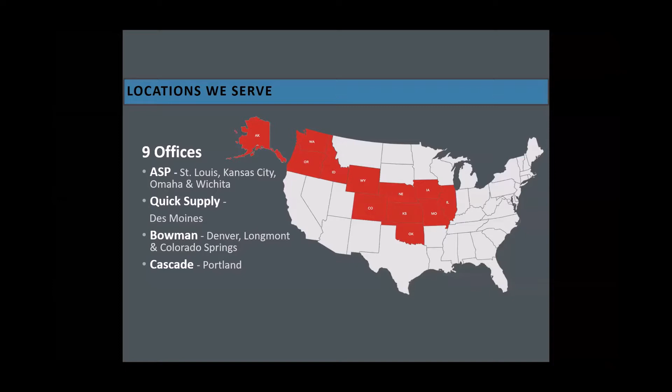ASP, Quick Supply, Bowman Construction Supply, and Cascade Geosynthetics are all one company. I'm the one civil engineer you see on the screen there. Our companies have been around for more than 40 years, providing not only construction site solutions, but also advice. And that's how we became the trusted site solution specialists across a large part of the United States. We do have site solutions that include erosion control, sediment control, geosynthetics, geotextiles, in addition to stormwater management, which is my specialty. And many of our branches have hardscapes and some really awesome outdoor living solutions.

We've also grown into some other paving solutions and other things that you might not think fit with the rest of our offerings. When in doubt, ask us. If you go to a conference, or you're looking online, or you're looking through a magazine and you see a solution you're not familiar with, reach out to your local rep from our companies or contact me directly, and we might actually know something about it or something like it.

And we are blessed with not only a lot of warehouse space, but a lot of yard space and a lot of trucks and a lot of drivers. One of the things we specialize in is putting together a specific order to bring to your site at a time that works for you. And we're very good at satisfying those needs.

Even during this pandemic, we have broken records in many of our branches throughout our companies with our sales numbers, because being in an essential industry, one thing that didn't slow down, fortunately, this year was construction. And the weather's cooperated to the tune of having, even in our northern states, Iowa, Nebraska, and even up in the Pacific Northwest, we are just still trucking right along. Normally the upper Midwest right now would be getting close to frozen and starting to shut down some projects, but we're still going strong.

So much so that some of our contractor customer friends are getting a little worn out. Some of those folks like to be laid off in the winter to do some hunting and to rest and recover, but they're still going strong, fortunately. So towards the end of this, I'll share our contact information again. Please reach out to me or any of us through any way you like to, whether it be social media or through our website or just the old-fashioned phone call. We'd love to get together with you.

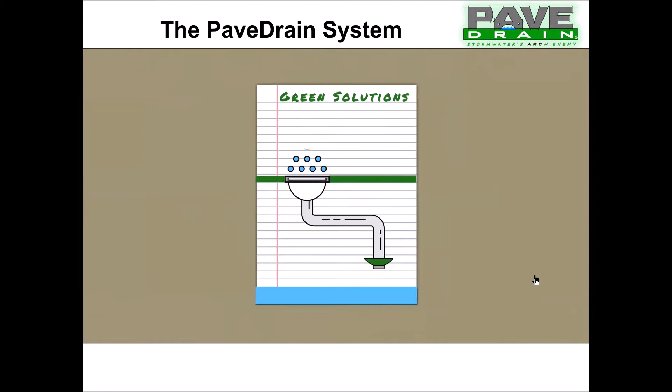Let's back up a couple of slides here. So there's where our office is located, and then the first thing we're going to show you is our cities are covered with impermeable surfaces. When it rains, rainwater has nowhere to go, except to sewer systems that struggle to handle the unprecedented strain. That's why we asked, what does your pavement do for you? Green technology has mostly failed to mitigate urban flooding and recharge aquifers. Green solutions look great on paper and may perform well at the start, but they disappoint quickly due to maintenance headaches, weak design, and their inability to handle intense rain events.

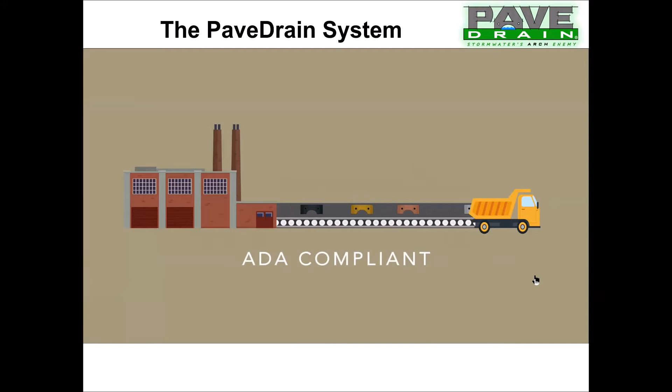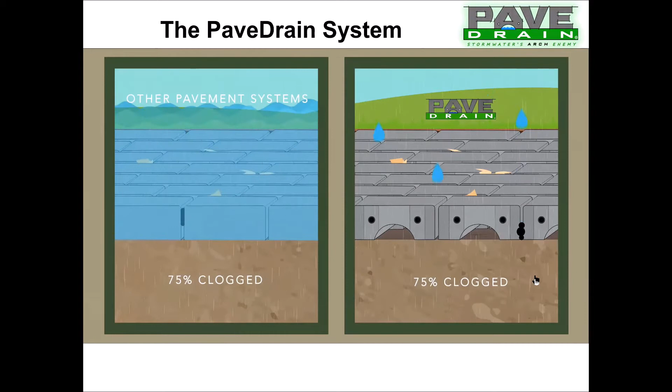The PaveDrain system solves these problems. For over 10 years, the PaveDrain system has proven effective for property owners looking to fix their drainage and paving challenges. The PaveDrain system is a simple yet unique solution that incorporates a patented arch design into large interlocking concrete blocks. The blocks are manufactured locally, available in several different colors, and are ADA compliant. When installed, gaps are left between the blocks for an unprecedented infiltration rate. Over time, debris will fill the joints, but maintenance is accomplished with vacuum trucks that remove the accumulated debris. Unlike other pavement systems, even when 75% clogged, the PaveDrain system still allows massive amounts of stormwater to infiltrate into the ground. With a properly designed and compacted open aggregate base, the PaveDrain system doesn't experience freeze or thaw heaving and can maintain its structure under extreme pressure.

We also offer heated PaveDrain, which eliminates the need for salt. The heated system infiltrates melted snow back into the ground, preventing runoff, which won't become an ice liability for you or your neighbor. So think about it: what does your pavement do for you? Contact us today to see how we can help with your new or existing infrastructure challenges. Visit our website at www.pavedrain.com to see recent success stories. PaveDrain, the world-leading permeable paving system.

There you have it. That video really does quite the job of selling it and telling everybody what it does. But I'm obligated to go through the whole thing because Bill promised to buy me lunch. Well played.

This is what the PaveDrain system is. We started in 2008, and those of you around in 2008 remember what happened quickly at the end of that year. The economy imploded, yet somehow we were able to keep going. Our first large-scale project was with this little company called Ford Motor Company in Louisville, Kentucky. About 90,000 square feet, still in use today. In 2018, 15,000 square feet of it was picked up, removed, and then reinstalled in another area due to plant expansion. So when we talk about the PaveDrain system being a sustainable stormwater solution, it is truly sustainable. They literally picked it up, moved it, and it's doing the same job it did 15 years ago, just in a different spot.

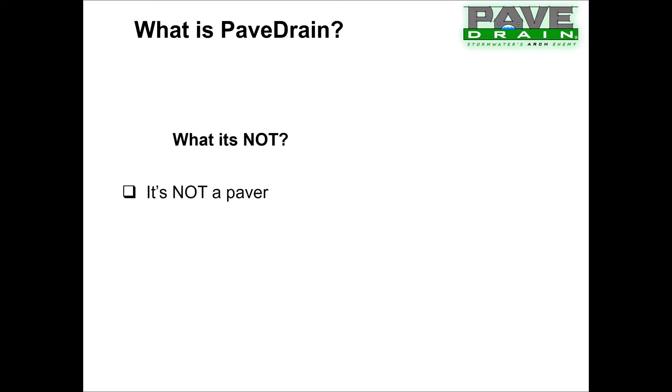So what is PaveDrain? The first thing we really try to differentiate ourselves from is this: it is not a paver. The only real characteristic it shares with a paver is that it's made out of concrete. That is it. We do everything we can to differentiate ourselves from permeable interlocking concrete pavers.

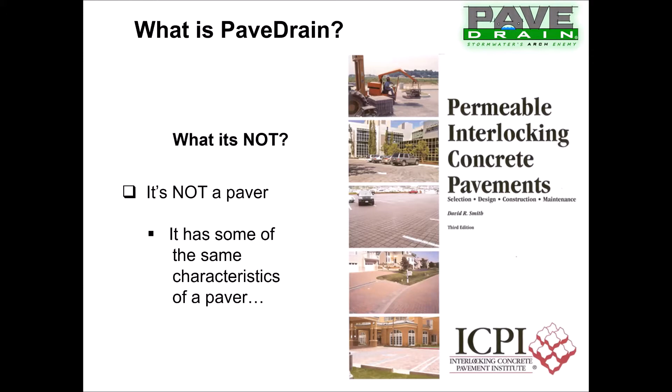We really like to look at ourselves, or think of ourselves, as a second generation. We took a lot of the positives of that, and what we really believe we did is improve on it. So what is PaveDrain?

It's a permeable articulating concrete block, or PACBM. It follows an existing ACB, articulating concrete block, ASTM. This has been around since the 1970s. Each individual block is 12 inches by 12 inches, 5.65 inches tall, and weighs in at a robust 48-ish pounds.

They're able to be picked up and installed by one person. There's a little known OSHA rule out there that says anything that weighs over 50 pounds requires 2 people to install it. Well, we know that gets broken quite a bit.

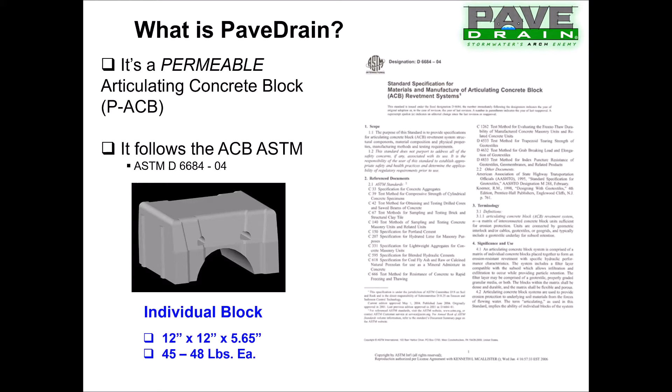So what we are able to do with all of our different block manufacturers around the United States is take this existing ASTM to them and say, make it to these specifications that have been around for many years. What it does is a bunch of things at once. It paves, it drains, and it can also store stormwater above your open aggregate base.

It is a system. We have multiple US and international patents. And what it really is, is a proven paving system. You'll hear us say the word system all the time because we need the proper geotextiles, proper compaction, proper geogrids, and everything else for it to work the way it's designed to work.

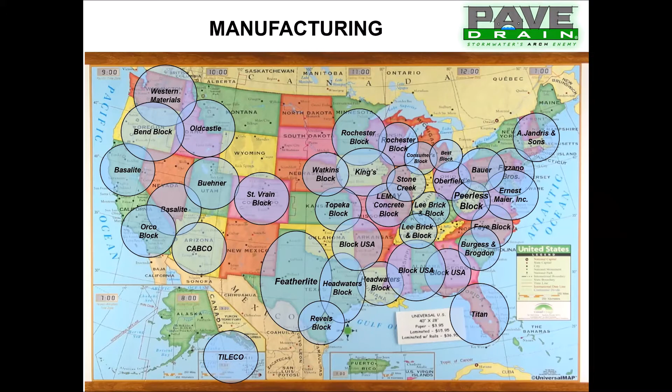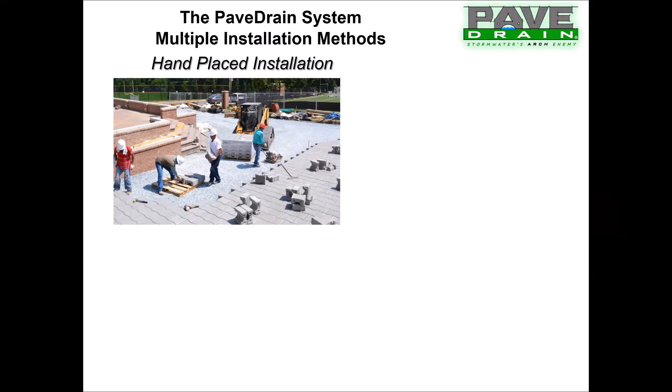We have multiple ways of installing it. Hand place installation - almost every project has some form of hand placement on it. A lot of you may be familiar with what we did early on in 2008, 9, 10, 11, 12, and into 2013, which was mattress installations, and most of that stemmed from the market.

There just wasn't enough work to go around, so the big general contractors all wanted to install mats across the parking lots, where they hooked up these 8x18 mats to a spreader bar supplied by us to a decent sized excavator, and they picked and swung large mattresses into place. We have not done a mattress job in over, I believe it's 5 or 6 years now.

What everything has gone to is what is called machine lay. And this has been a great way of going about it.

Many different types of contractors all across the country do that type of install. Between Bowman and ASP Quick, we can all figure out where that needs to go.

Now, one of the biggest differences between PaveDrain and the permeable paver world is they require rocks between the joints, meaning a permeable paver requires rocks to interfill it. Why? They don't really interlock, even in a herringbone type fashion, and they also need that rock between the joints - it's called aggregate interlock - in order to stay together, stay integral.

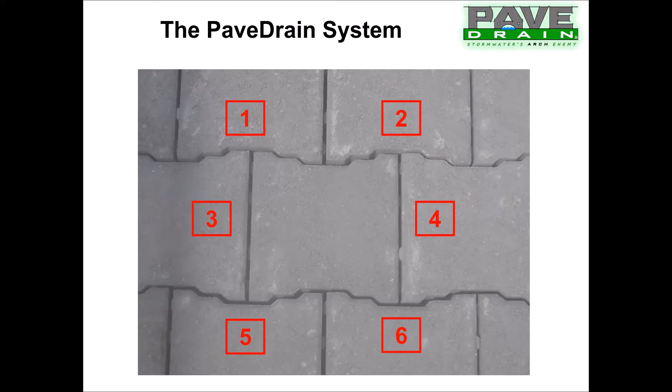PaveDrain, because of the way it was designed, each individual block is surrounded by 6 blocks - 2 above, 2 below, and 1 on each side. It is designed so that the joints between the PaveDrain blocks are meant to be left open. We do not want to sweep or fill these joints with rock.

We want that water to get in the ground, get back into where it belongs. We do not want it running off. We want it back into the ground. The other thing this does - eventually it'll fill up with debris. We understand that, and this will help tell you when it needs to be maintained. We'll get into that in our maintenance section a little later on.

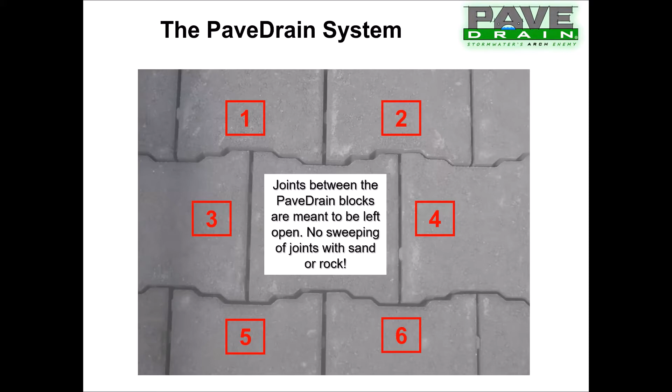All the corners are rounded so that no edge is created to catch on a snowplow. Will a steel snowplow blade do damage to a PaveDrain block? Absolutely. Will it chip it? Will it scrape it? Absolutely. Will it flip it out? Pretty much impossible. But it will do damage to it.

After we get done in our northern climates, after the contractor gets done installing it, one of the things we recommend and really require in our northern environments is to seal it. We can all help you determine what is the proper sealant to be done. Unlike other permeable systems, once installed, if they were sealed, they would no longer work. The PaveDrain system, once installed, you can go back in with a boom sprayer, a walk behind sprayer, whatever, and you can spray these into these systems and help seal them against the ravages of salt.

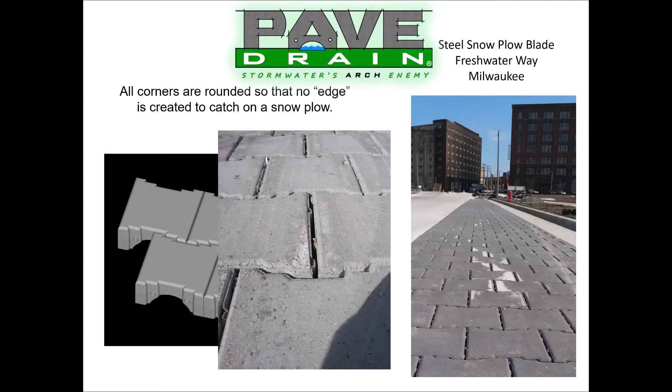Salt's very hard on anything with concrete. The PaveDrain system is no different. When we talk about PaveDrain, we talk about the system. Reasons we're with companies like ASP Quick, Bowman is because of their knowledge in the geotextile world. We need that system. We need it built correctly from the ground up.

The bottom layer of geotextile or geogrid, depending on your project, is typically woven monofilaments or multifilaments. We do not, repeat, do not want the slit tapes. Those filaments are flat. They have a tremendous amount of tensile strength to them, but they do not allow water to pass through. The monofilaments or multifilaments allow a tremendous amount of water to pass through. You hold it under a sink and all that water would go right through it, but they also have a tremendous amount of grab tensile strength to them so they can support the vehicular loading.

One thing we don't want is the non-wovens or the felt-like geotextiles. Most of the times they just do not have enough tensile strength, and they also can clog.

The rock layers, we need it compacted. We need it compacted in lifts. The bottom layer of rock on the bottom side is typically an ASTM number 2 or 3 size stone, basically the size of your fist. The top layer of rock, or our bedding layer, is an ASTM number 57 stone, 3/4 inch clean, angular. We want that rock all compacted in lifts and worked, especially that top layer of 57 stone, worked into that layer of number 2 or 3 stone. All of this is covered in our specification.

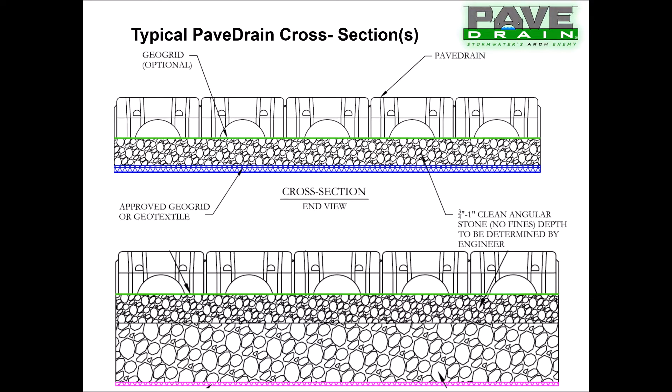One of our first projects we got involved with was a project in Bladensburg, Maryland, right outside the nation's capital. They were tired of their asphalt parking lot and all of the maintenance headaches that went with it, including patching it, sealing it, resealing it, patching it some more, and then again, after you seal it, you have to go back in and restripe it.

What they did is they went in and installed PaveDrain. And unique to this project, it never did anything but rain, sleet, and snow while they were putting this project in. Kind of unique to PaveDrain is the ability to work in inclement weather.

We've had several projects over the years that have allowed projects to get back on track or stay on track due to the fact that this is a precast system and it can be installed in rainy weather. Now, torrential downpour, nobody wants to really work in that, but it can be installed when it's raining, sprinkling a little bit, and we can still keep things on track. This particular project was under that, and they kept going and were allowed to put it in.

After that project was installed, the fire truck...

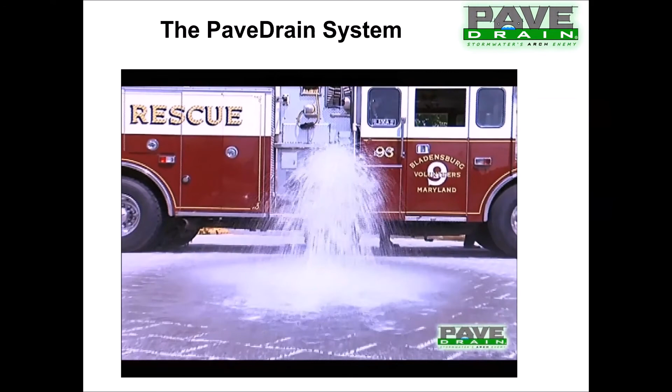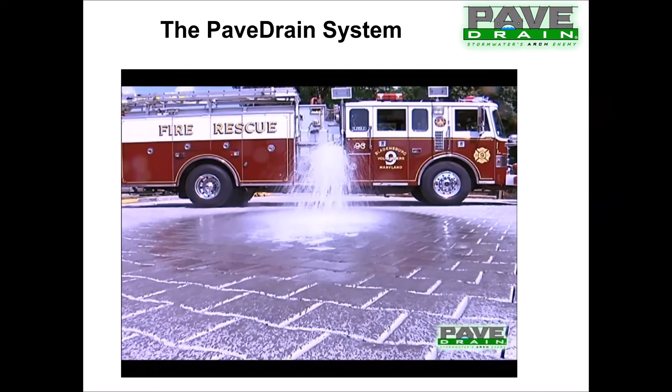Infiltration rates, as you saw from the fire truck, are one of our big benefits. That fire truck drove right on top of the PaveDrain to empty the entire tanker load, and all 550 gallons were dumped in less than 60 seconds.

Our infiltration rates are exceptional. Everybody tests according to an ASTM standard called ASTM C1701, often referred to as the bucket test. Basically, you take a 5-gallon pail, cut the bottom off, flip it over, put plumber's putty around the bottom, and press it in. It's about 11.5 inches in diameter. Then you take another 5-gallon pail with the bottom intact and pour water into that ring, timing how long it takes to infiltrate.

Most permeable systems will infiltrate at 100 inches per hour, which is pretty exceptional. Permeable pavers run around 100 inches per hour, pervious asphalt and concrete around 500-600 inches per hour. PaveDrain has been documented over and over again, after several years of being installed, at over 1,500 to 1,700 inches per hour. Now, we understand the soils beneath there are not going to percolate at that rate - we fully get and understand that. What we're trying to do is compare apples to apples, which is surface infiltration rates.

The next video we're going to show you documents all of these infiltration rates on a project out in the Washington, D.C. area. One of the things I want you to pay attention to is the dates of when everything was installed.

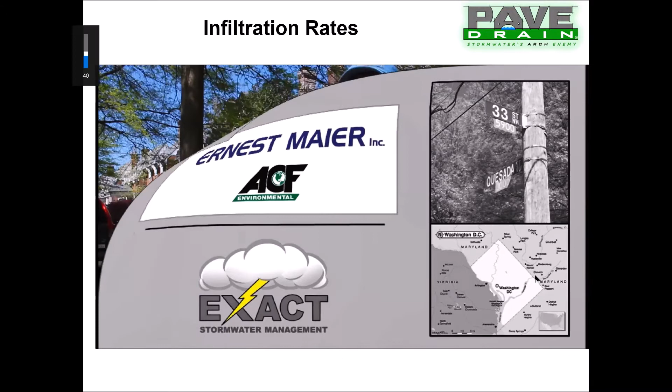I'm Sean Simone Pietri, Exact Stormwater Management. I do a lot of stormwater BMP installations, maintenance, and testing. I'm here today in Northwest DC, hired by Ernest Maier to do some testing on porous pavers, porous asphalt, porous concrete, and PaveDrain.

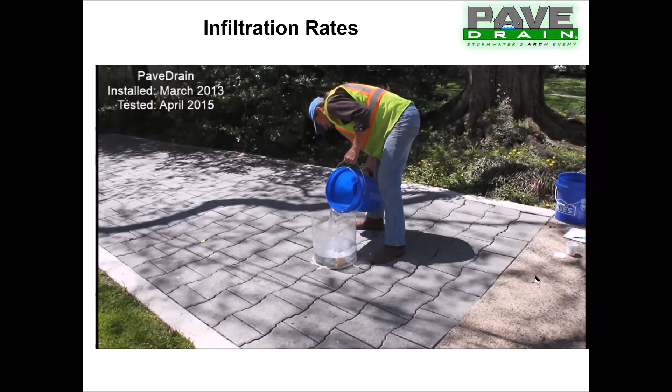We've tested 4 systems today. The porous pavers we started with got 3.2 inches per hour infiltration rate. Then we went to porous concrete and got 2.4 inches per hour. We went to porous asphalt and got 3.1 inches per hour. And we're here at the PaveDrain, and we got 1,640 inches per hour infiltration rate. This is all according to ASTM C1701.

One thing to point out about our test: if you notice the background, we were installed a full year earlier, and also under a tree, which dropped a tremendous amount of debris. All of the practices tended to drain down near us, and we weren't real happy about the way it went, but we were thrilled with the results. The infiltration rates are one benefit to us, and that's a tremendous start.

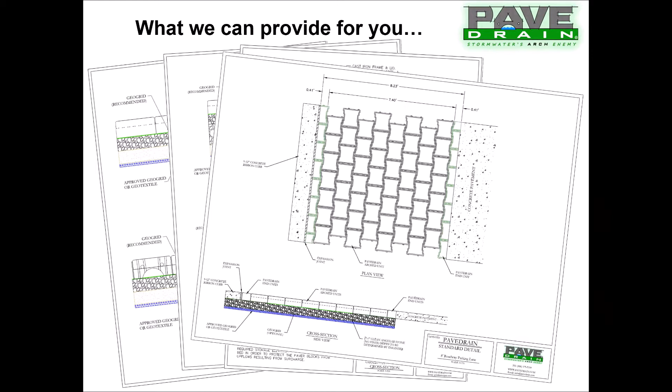Other things we can provide for you are AutoCAD drawings on top of AutoCAD drawings. I have a saying - I think it's a lot easier to edit than it is to create something from scratch. So now we're going to get into some more of our advantages.

The Achilles heel of green infrastructure really has been maintenance. It's kind of been what chases people away. Our massive infiltration is a start, and we've been a part of numerous, multiple studies all across the country. This maintenance has all been documented, and we can deliver low cost results, and we'll get into that now.

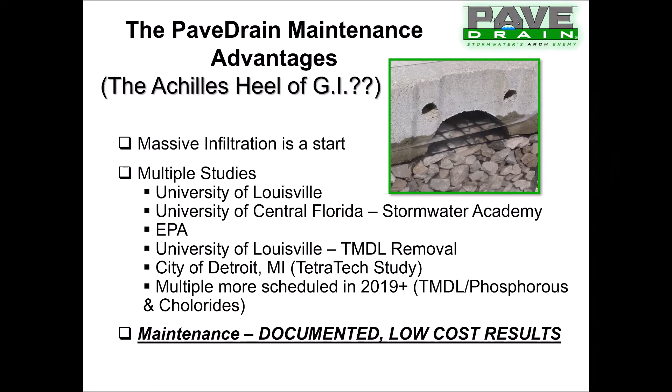So here are some things we can provide for you. One of the first tests we were involved with was an assessment of infiltration, performance, and maintenance of the PaveDrain system. It started out as a permeable pavement study, but the other systems plugged and clogged so fast in the environment they were installed in that it became a PaveDrain study that we still document, use to this day, and is still going on right now.

The second big test we were involved with was the University of Central Florida, UCF, in Orlando, and that turned into quite a study in itself. They test things a little differently in terms of their infiltration device - they don't really use ASTM C1701, they go about their own methodology called the ERIK.

This is just how dirty they make everything down there. What they do is come out with a bobcat and literally dump topsoil on it. If any of you landscape architects, civil engineers, or owners are out there, you know this can happen - where a load of mulch gets dumped onto a permeable system that nobody wanted it to. The difference with this one is they watered it in and really went to work on it.

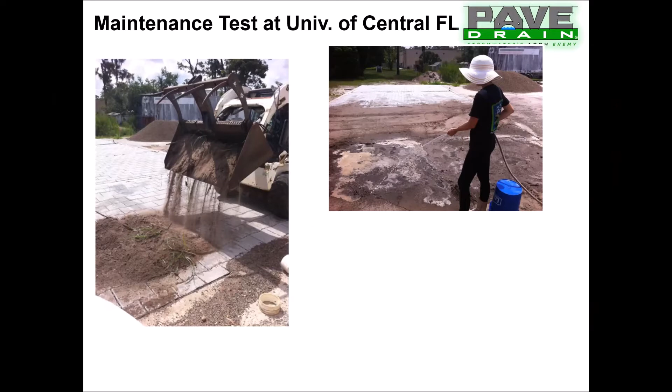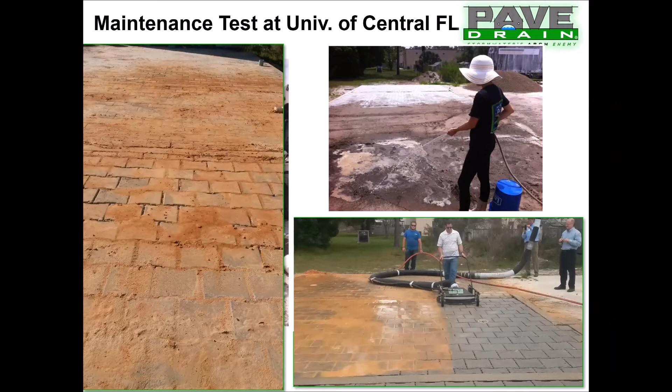Then they let it cook in the hot Florida sun for a couple of days. And then they came back to us and said it's time to clean it. We went out with our PaveDrain vac head, which we'll show you some videos on shortly, and we were able to clean this and bring it back to over 90% of its original infiltration rate.

What we're trying to tell you here is we know people don't like maintenance. If I was in a room right now, I'd ask for a show of hands of any owner that likes to do maintenance - no one ever does. And what's going to happen is we know full well that the maintenance is going to get kicked down the road, pushed down, forgotten altogether, and now we're in trouble.

The PaveDrain system has the ability to be brought back to literally almost brand new when maintenance is completed with the right equipment. After all of these tests, we were part of another University of Louisville test with pollutant removal, and then an EPA test in Louisville about utilizing a permeable system in conjunction with traditional gray infrastructure.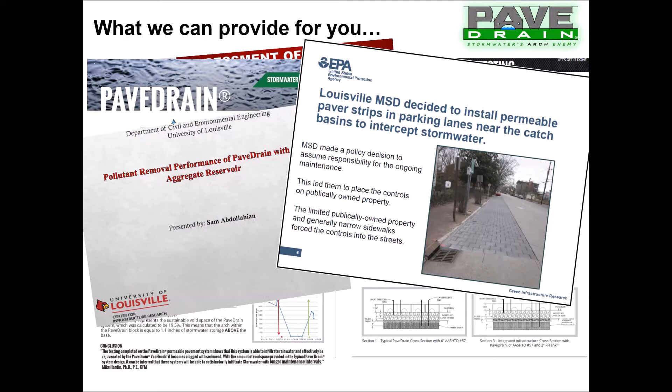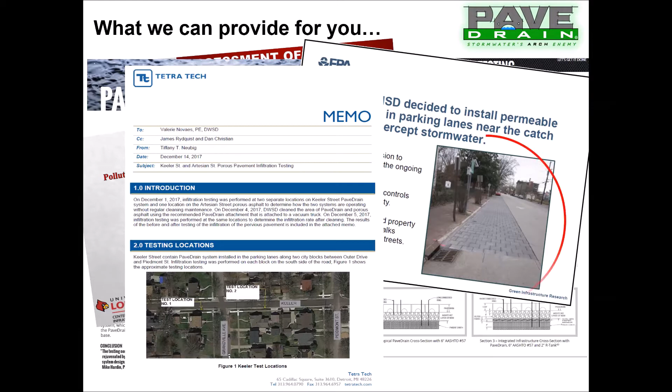This photo on the right has been repeated over and over again in municipalities across the United States. Tetra Tech did their own study in Detroit on a very similar project. Everybody was trying to come up with their own infiltration rate on how they did it. This study echoed what was going on in our circle on the right. This is what was really done on Control 19H and 19G for the City of Louisville and a study by the University of Louisville.

Most permeable systems out there talk about a run-on ratio of 1-to-1 or 5-to-1, meaning 1 square foot of impervious surface running onto 1 square foot of permeable surface. These ratios were much higher - 16-to-1 and 20-to-1. There's a tremendous amount of debris, organics, cigarette butts, you name it, running down this street and collecting in the PaveDrain system.

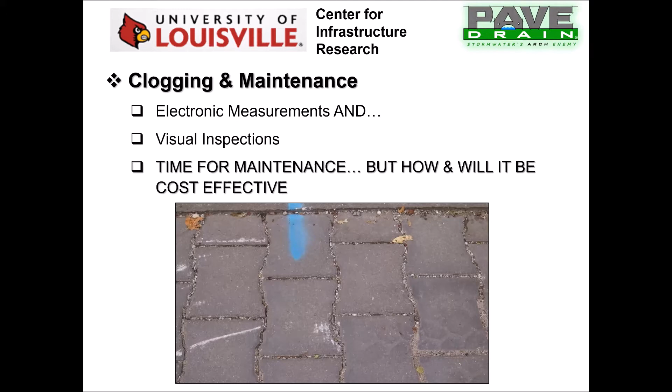The problem becomes, how do you clean this? Clogging and maintenance - we know that it's going to happen, we know that these joints are going to fill up. PaveDrain has the unique ability that you can basically drive over it or walk over it. If the joints look like this, meaning they've been filled up with debris, it's probably time to do some maintenance. But the question is how to do it and how to get it done.

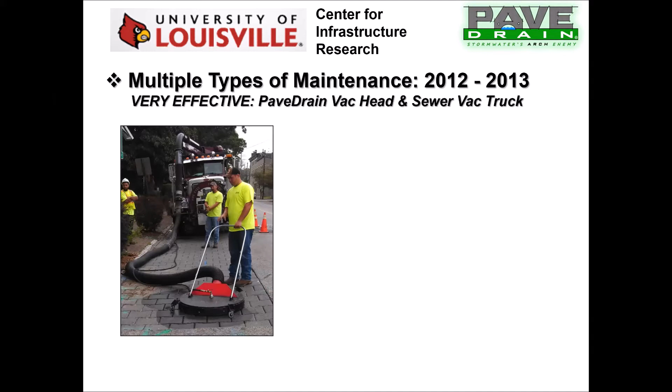We have various types of maintenance that we got into. Our original PaveDrain vac head and sewer truck did a tremendous job of doing this, as you can see in the before and after videos. It really worked great, even removing some of the particulates that had been pressed down and pushed down from pressure washing. This is a tremendous way of going about it.

That video you just watched was of the Elgin Whirlwind going by. Now, what was happening to us when we got out into the marketplace was that as we started doing bigger and bigger projects, especially in streets, municipalities said we just cannot have our laborers walking around out in front of a truck - distracted drivers, liability, things like that.

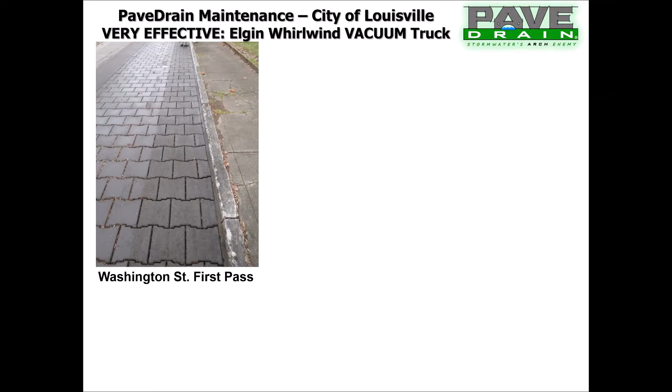There's so much suction on those trucks that the PaveDrain blocks will actually rattle and move a little bit. You can see with the amount of force that it has, it basically sucks all of that debris up out of the joints, and it also cleans the blocks as well with just a little bit of water. We even took a tape measure and dropped it down between the joints to show that we were going all the way down to the rock base, or the geogrid, that this was sitting on.

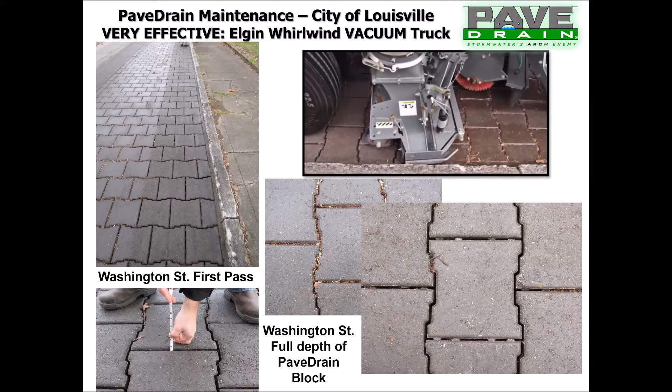Let's see what's happening. Anything I can do to help you? Hang on, let's see. I'm going to jump to this one, and go back to this one, and let's see if it starts back up. There it goes.

In those two small projects, about 1,500 square feet, in one year's time they captured over 250,000 gallons on about 1,500 square feet. That was just one year, and all of that water came in the last two and a half months of the year. It was a drought the first half of the year. All of that came at once.

When you take about 1,500 square feet accumulating 250,000 gallons one year, and 250,000 gallons the next, and you start moving this and putting areas like this all across your city, you can really affect localized flooding and infiltrate and capture a staggering amount of stormwater, putting it back into the ground instead of sending it to the wastewater treatment plant or wherever else the stormwater runoff is handled.

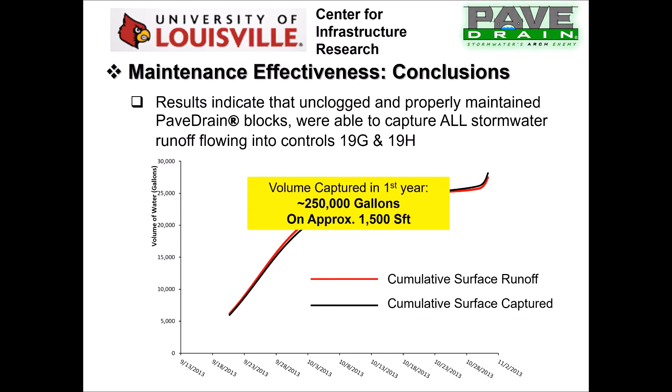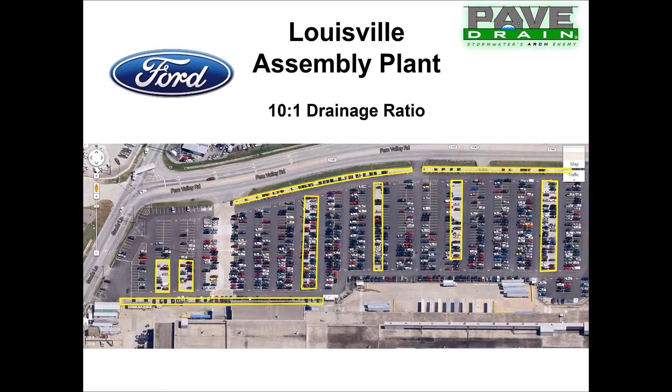What was going on there is there was a staggering amount of debris out there. We're showing you that the Elgin Whirlwind is what was utilized. It's the amount of debris and mud brought in off these trucks into the parking lot that would wash off the vehicles and right onto the PaveDrain.

You can see we're only showing about 4 feet of PaveDrain, and just how dirty that is after - it was basically, at that time, just over 8 years.

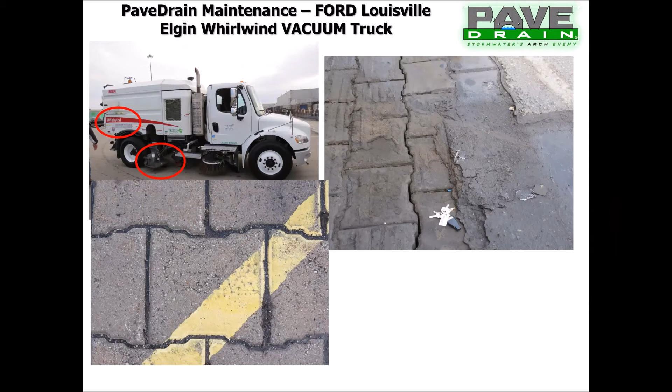First pass over the top prior to cleaning on the left, and one pass on the right. You can see just how much debris was sucked up by that Elgin Whirlwind. They made several passes around one of those areas.

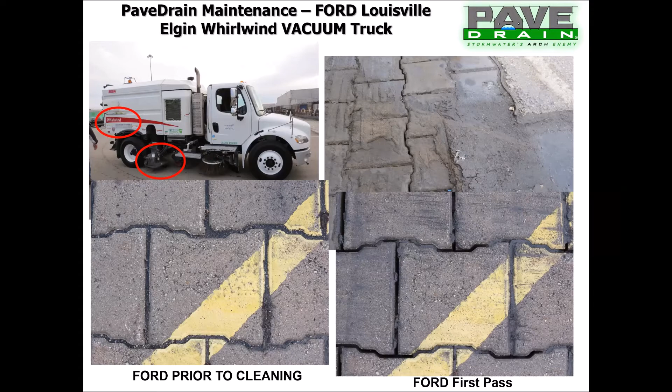Then we opened up the back of the truck, and in the back of that truck was a staggering amount of nastiness.

Now, if you were to fill that truck using permeable pavers instead, what would be in the back of that truck? It would be debris, but also all the rock that had to be sucked out, meaning your dumping costs would increase greatly. Then you have to go rebuy the rock and reinstall all of it. With PaveDrain, you simply suck it out, and you're done - on you go.

What was starting to become apparent to us, over the years as we did project after project, is we started hearing stories of how an area used to flood and now it's gone - we had this issue happen, and it's gone. All of these situations started coming up, and people started really wondering: how much stormwater are we actually capturing?

We wondered too. And the other thing that came up is everybody keeps asking, when do I maintain it? I know there's a visual way of looking at it, and we've discussed that, but people are also looking to take the man-made decision out of it and let something tell us electronically. So we started asking ourselves: how much stormwater are we capturing, and can we have some other way to maintain this?

What we started doing is we hooked up with a company here in Milwaukee called P4 Infrastructure, and they came up with a battery and solar powered sensor that can be installed into an existing PaveDrain system. It doesn't have to be done up front.

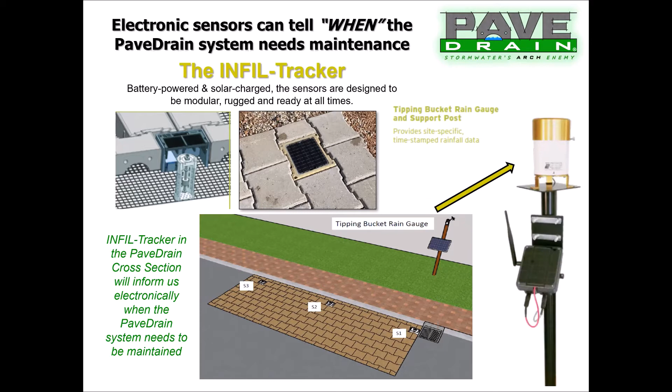It can all be done after the PaveDrain is installed. The INFIL-Tracker can be installed into the PaveDrain system, and it will send a signal up to a rooftop or on top of a pole that can then send a message to a computer to tell you just how much stormwater you have captured, and also if you are not capturing any more stormwater, what maintenance is ready to go. This is a tremendous slide showing what this cross section can look like.

I'm going to give everybody a minute to digest this slide. The pictures on the right show the INFIL-Tracker. It's a solar operated, battery operated enclosure. That top battery, that solar panel, can be driven on. It can be scraped up to 90, I believe 93% scraped, and it will still charge the batteries.

What it does is send a signal to the relay station on top that's hooked up to the internet, which then sends a signal to a computer at a desk somewhere telling it exactly what is going on. The beautiful part of this, one of the big things we demanded, was that this needs to be installed after the fact. We did not want to coordinate everything, and it would be impossible to coordinate some sort of sensor being installed prior to or during construction. We do it afterwards.

It can go into an existing PaveDrain job that has been in for several years, like this one in Wisconsin that we did. Looking at the left, you will see the Infil-Tracker installed, and we're showing a cross section. The Infil-Tracker device is basically just a float valve inside of there.

What was happening to us on our clay-based soils was that everybody, including geotechnical engineers, will tell you that you can't infiltrate on clay. Well, what we were seeing and electronically monitoring and documenting is that it does infiltrate on clay. Maybe not as fast, of course not as fast, but in most cases in 72 hours, the water level is completely gone.

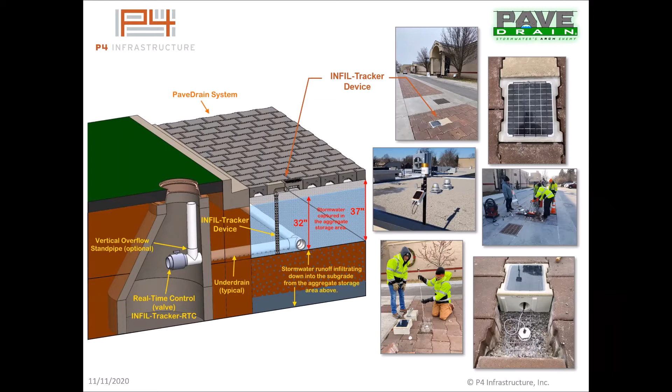This allows municipalities and engineering firms to get full credit for the amount of stormwater they are infiltrating, and tells a much better story on just how much water you are capturing inside a PaveDrain cross section. Some of the rain events we have captured and documented were on literally what has been termed bathtub clay. This will never infiltrate, and yet it is infiltrating. We just have to give it more than 72 hours to get it done.

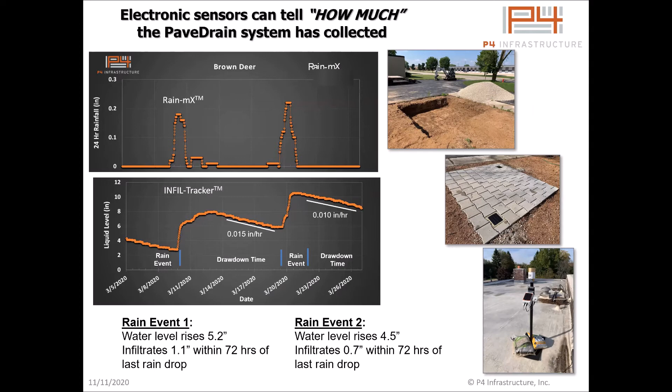This is something a lot of people don't know. They put in a bioswale, and have no idea how much the bioswale is taken on, or not taken on. We can document all of that.

We can figure it down to the price per gallon you are capturing on a yearly basis.

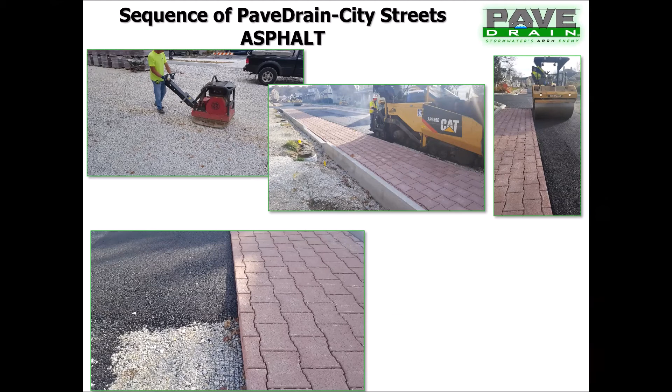Tremendous story right there. Now we want to show a construction sequence of PaveDrain on a city street. Asphalt, compact, compact, compact. Nice thing about PaveDrain, if it's installed ahead of time, which is what we really want, you can run the asphalt machine and the roller right next to the PaveDrain. You can see the geogrid extending past that a little bit. All the geogrid, geotextiles, PaveDrain, it's all a package deal from ASP Quick, and you can see this roller driving right next to it.

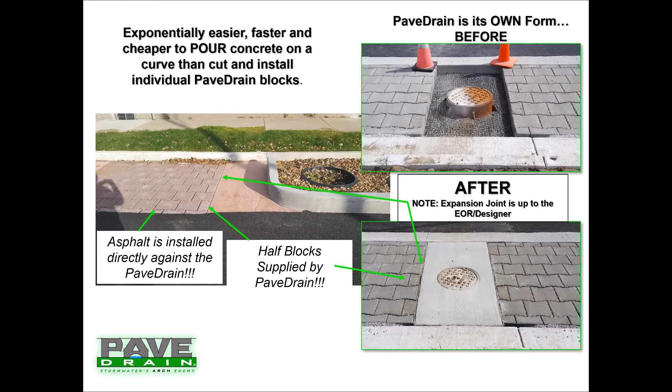Another thing we started looking at was the silica laws that are out there, and we can get by with a lot of projects where we barely cut any PaveDrain blocks. Around this manhole, it's much easier, exponentially easier, to just have PaveDrain be the form. PaveDrain's not a paver, these are big, thick blocks. You put a little expansion joint on the sides and it's a form, then pour the concrete right around it. Looks better, lasts longer. If anybody's walked over a little paver job and seen a little cut piece, it's always the first one that's broken, missing, and it just doesn't look good. So this is another benefit of the PaveDrain system and how we go about doing it. The infiltration rate is unprecedented. We don't need every last square foot right up to a manhole to achieve proper infiltration rates. Minimal block cutting is a tremendous benefit on this.

Also on city streets, on asphalt, there's a project in Indiana we'd love to showcase, what went down with this particular project. There's no ribbon curb on this. Getting rid of the ribbon curb saves a tremendous amount of money by doing that. This particular project was bid head to head against traditional gray infrastructure. We had no inlets, no ribbon curbs, sanitary pipe only on this.

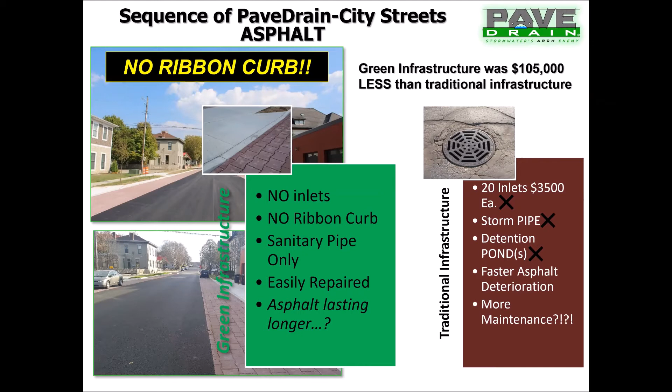This is very easily repaired. If you have to repair some blocks, you pop out a block in literally a matter of seconds. And what the city is telling us, because they're now on phase project number 6, is that their asphalt is lasting longer on this. Just think about this from traditional infrastructure: inlets at $3,500 each are gone, storm pipe gone, detention ponds gone, and don't forget about property taxes. Faster asphalt deterioration means you have a lot more to do, and what we're also hearing is more maintenance. This green infrastructure project with PaveDrain was over $100,000 less than traditional infrastructure. Quite the story, and this project went on for about 6 blocks on each side.

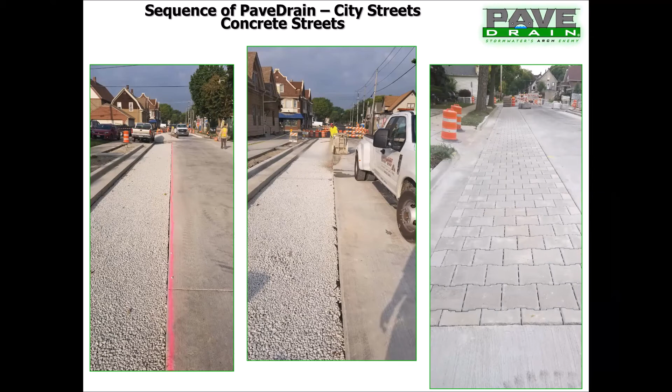So a sequence of city streets with concrete. Now we showed asphalt, but we have concrete customers out there too. There's a particular project in Milwaukee. What we've asked the contractors to do is overpour the city street by an inch or so, then come back in with a concrete saw to cut it straight, because no matter how straight contractors think they're pouring the concrete, it's pretty tough to do. The concrete saw will cut it much straighter, and you can drop the PaveDrain blocks right into a predetermined measurement. So neither the PaveDrain blocks have to be cut, only the city street. It's a very efficient way to cut off an inch or two of excess concrete and drop in the PaveDrain.

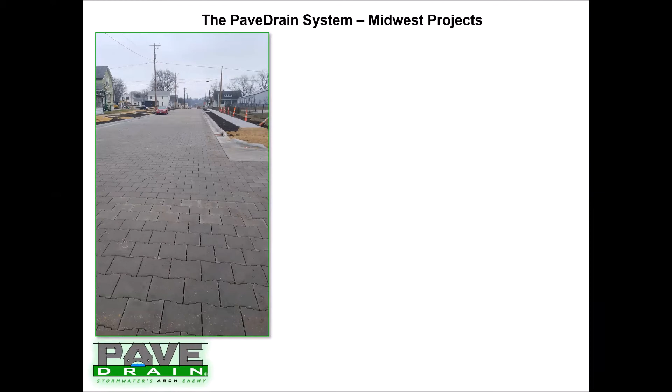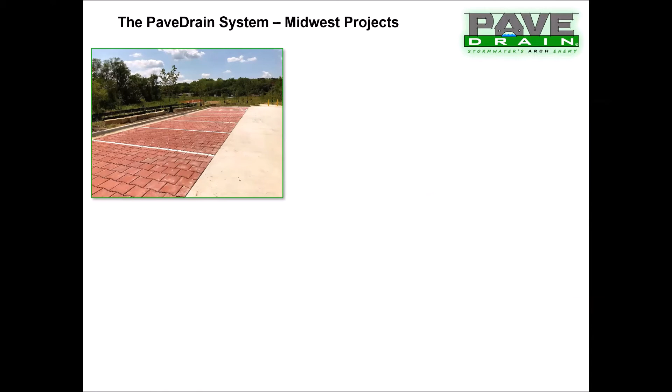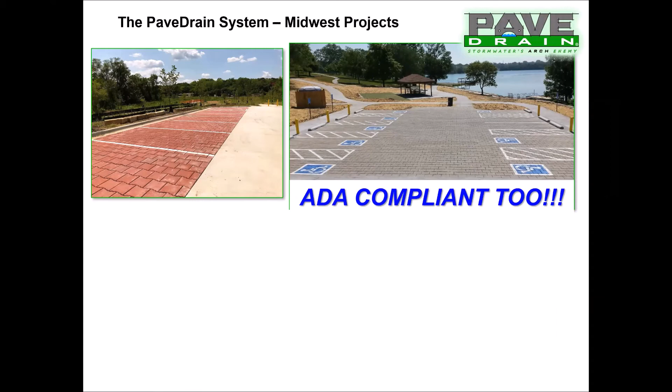There was a supplied installation, I believe it was already going on 2 years old out that way.

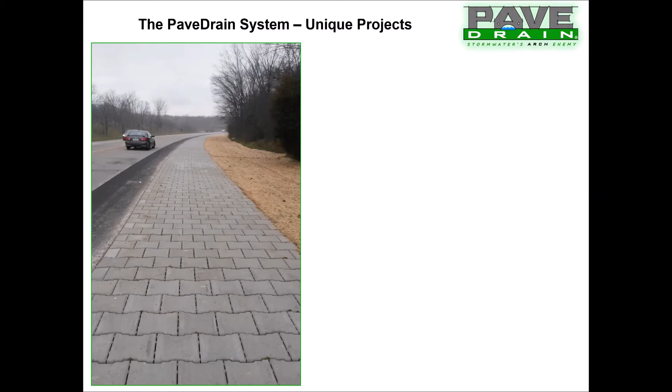Some other unique projects—this is one in Wisconsin going around a turn or radius. They never cut a block going around this. There's no ribbon curb on this, especially on the outside, because the blocks all literally pinch against one another, and you'd have to shove all of those blocks out of the way to get them to move. On that project, the blocks have a little bit of an accordion effect to them.

Of note, that previous bus turnaround was asphalt, and they had to replace it every 3 to 4 years. They finally got tired of doing it. It has been installed since 2010, and they've never had to replace it.

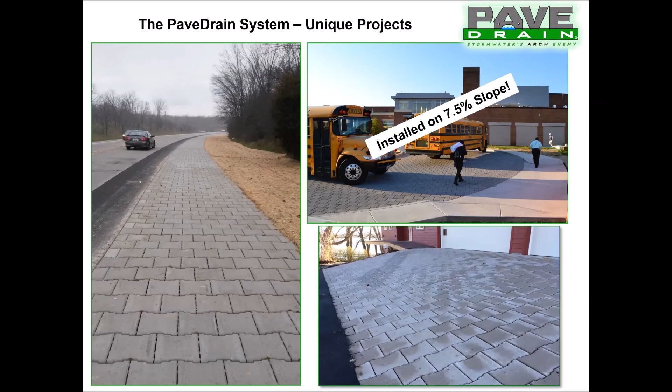A little driveway application as well, because we do some residential work.

Some other applications—another project in the Midwest, I believe this one's in Wisconsin. Most of the times you'll see the PaveDrain installed in parking stalls, but this was put in the drive aisles. Why they did that was the buildings on the right and left were rather old, and the maintenance guy did not want a permeable surface right next to his very leaky basements. So the design firm moved it to the inside.

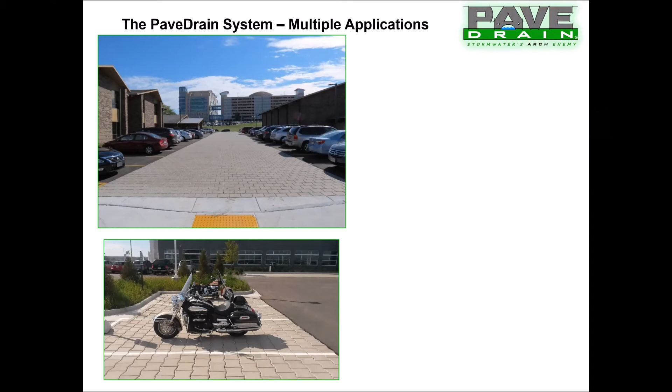Being from Wisconsin, I have to show you, by state law, a Harley Davidson that we can park on top of that. So that's done. Bill, if anybody has any complaints, please make a note that I have shown the Harley Davidson.

And a unique project, the National Arboretum in Washington, D.C. Sidewalks are becoming quite the little market for us in certain parts of the country, namely in Hawaii, where I will be in February. Surprising, right? A Midwest guy going to Hawaii in February.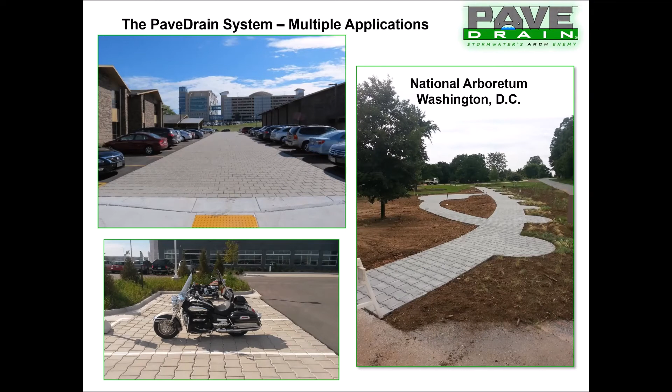So we do all colors. Most popular color is gray. Second most popular color is charcoal. Yes, the charcoal does melt snow faster, as we've seen, and it's a tremendous way to hide all of the drippings and everything else that occur on a PaveDrain system. Some colored projects across the country we've done—most of these are in Florida.

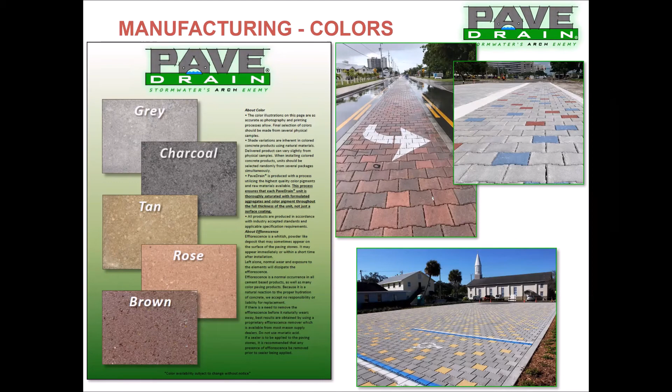Another project we've gotten involved with is bicycle lanes. If anybody has ever looked at the green paint that goes on top of asphalt that seems to last about 10 minutes, we have started doing green PaveDrain blocks. Now I'll warn you, these are the most expensive. The two most expensive colors we can do are green and blue, and then third is yellow. These are very expensive colors to do because we have so much pigmentation to buy to make them green, and we also have to buy white cement and a lot of times white sand to really make this green stand out. But the green lasts a staggering amount of time compared to the painted-on green.

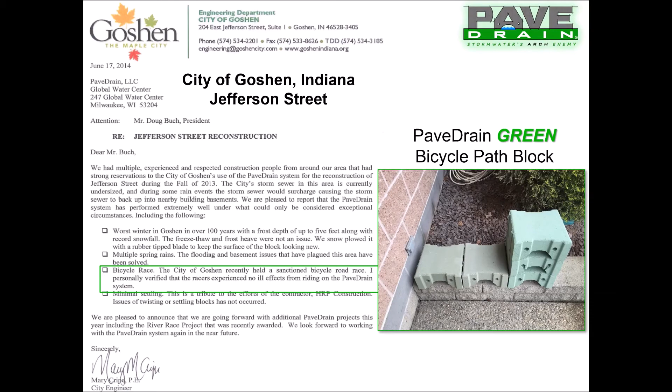Additionally, this is permeable, so you can ride across this. You don't have to worry about bicycles slipping, because the water is going to infiltrate down into the PaveDrain, so it stays dry. Mary Cripe, engineer for the City of Goshen, set up a sanctioned bicycle road race with small tires that rode along a full block of the PaveDrain system and experienced no ill effects from riding on top of it.

Another great way to make your project look good and stand out, and maybe you can use it as a fundraiser, is logo blocks.

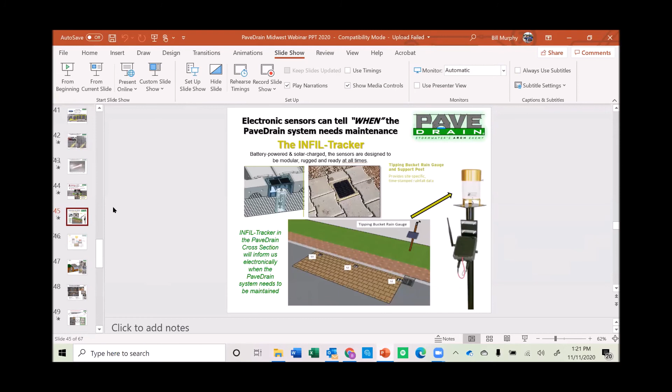They could tell it wasn't working because residents came back to them and said, hey, we're starting to get flooding in our yards again, we need this to be cleaned. That's what really drove it — the city went out and said, yep, this stuff's dirty. They got in touch with a maintenance company via us, and that maintenance company went out and maintained 6 city blocks for this city. So that was without electronics.

A fun story that I love telling my sales team: I have run into a lot of public works folks. This is before COVID.

There are people who own those amazing machines that don't use them to clean PaveDrain. So what I do is contact that city and present PaveDrain to them, because they already have the machine that could clean it. You've got the equipment to clean it, you're way out in front. Put the PaveDrain in, document how much you're capturing, and you've got a tremendous story. We're doing great on time because you're really efficient with your answers, unlike me with my stories.

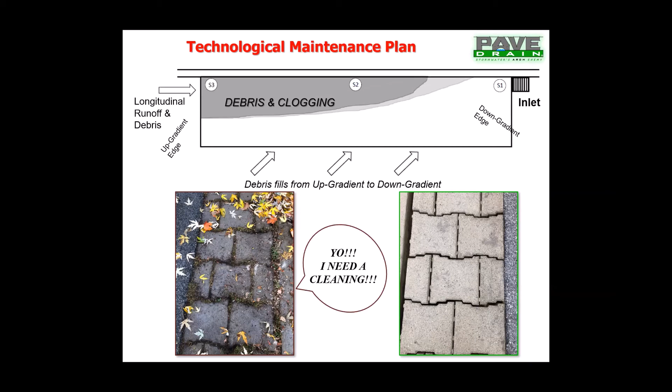So with that, I'm going to click quickly through your slides. Actually, I'll go to the slide sorter. One you went by pretty quickly because you were concerned about time was this slide I think is absolutely awesome with the graphic. I noticed on the slide after this, Doug, you showed multiple P4 INFIL-Trackers, even on one project. Here we're looking at just one. What can you tell us about that? When would you decide to use more than one?

A lot of times you decide to use more than one if you have a project that spans, because we get into 10, 12 blocks. One probably isn't going to cover you on a project like that. You're going to need maybe as many as three. It kind of depends on the environment it's installed in. If it's installed in a very woody neighborhood with a huge canopy, you might need an extra one. If you're out in the open, like we're showing on the picture up in the right, on the Infil-Tracker there, there's nothing threatening that. You only need one. We can help you determine that.

And then another question I'm coming up with on my own, looking at this picture - I wonder if we don't have a rooftop to put the tipping bucket, what else do you recommend? Where can we put this that pedestrians aren't? A telephone pole. Got to get them up away from the pedestrians so little kids aren't running around trying to high five them and knock them around. Got to get it up there. Plus we want to get internet and get it up there and out of the way.

Is there any issue with cities getting permission to put that kind of thing on a pole, or not really? None.

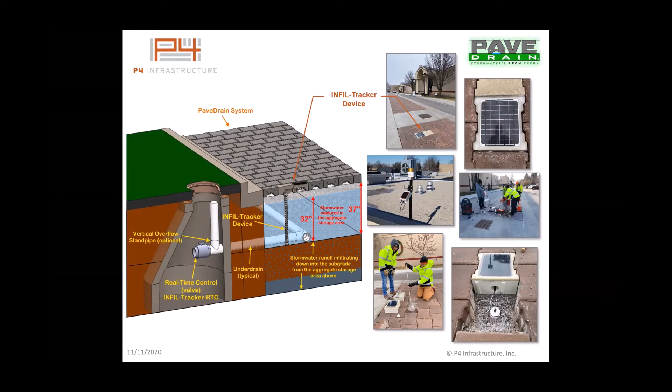The documentation behind this tells the story to your citizens or anybody, showing we captured 3 million gallons of stormwater on this project. That's a staggering number. What happened on a couple of our jobs is the models said we were going to capture 80, 90,000 gallons, and we were capturing 4, 5, and 6 times that amount because the models were wrong. I think that's the story MS4s want to tell - they want credit for all their efforts, whether under a consent decree or not. It's important they measure these so they can submit metrics to whoever's reviewing it, and see the value of their dollar spent on green infrastructure.